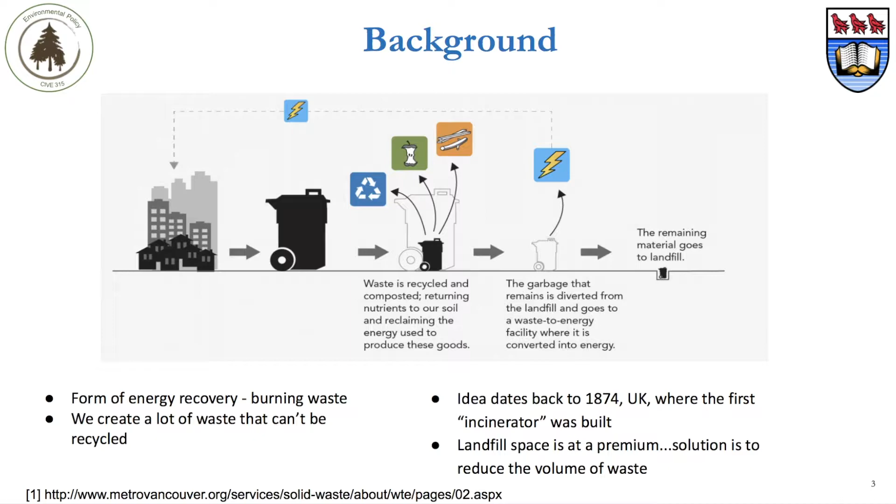Some background. Waste-to-energy is a form of energy recovered from burning waste. We create a lot of waste that can't be recycled and is sometimes even impossible to recycle. Landfill space is at a premium, so the solution is to reduce the volume of waste. Independent studies and scientific evidence around the world have actually concluded that modern waste-to-energy facilities are safe for human health and the environment.

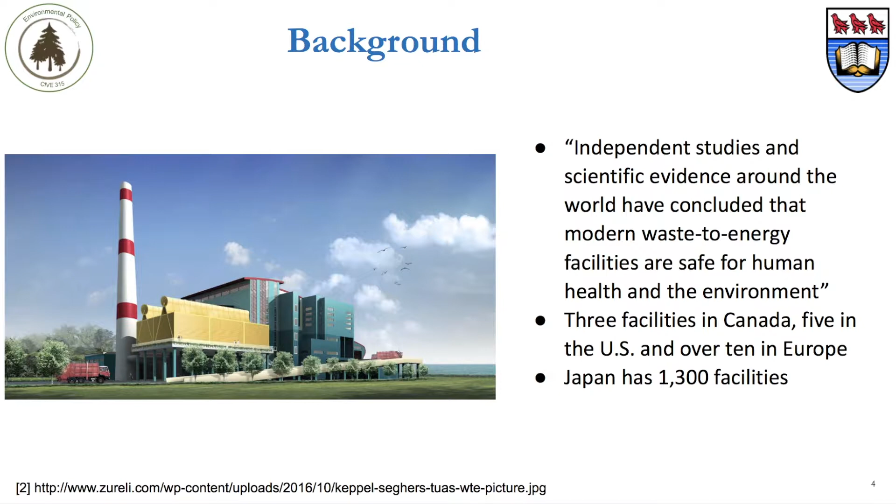There are three different processing ways. Mass burn incineration, which is the most common type. The second is gasification, and the third is refuse-derived fuel.

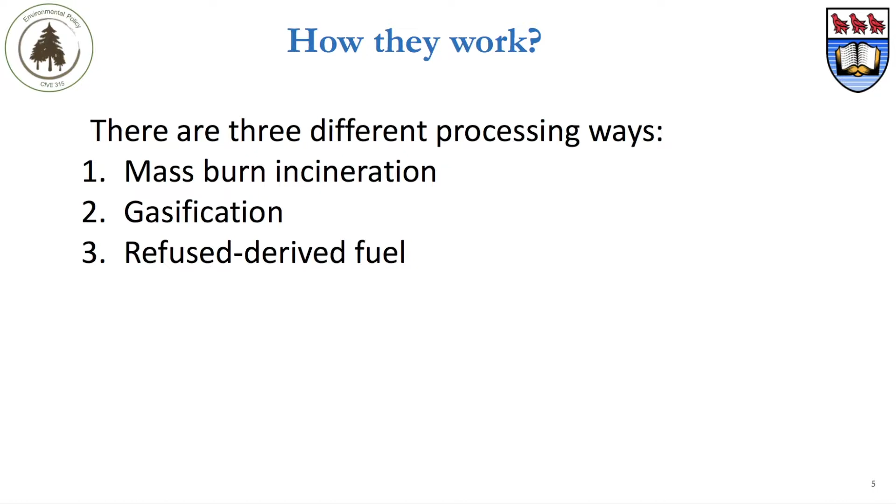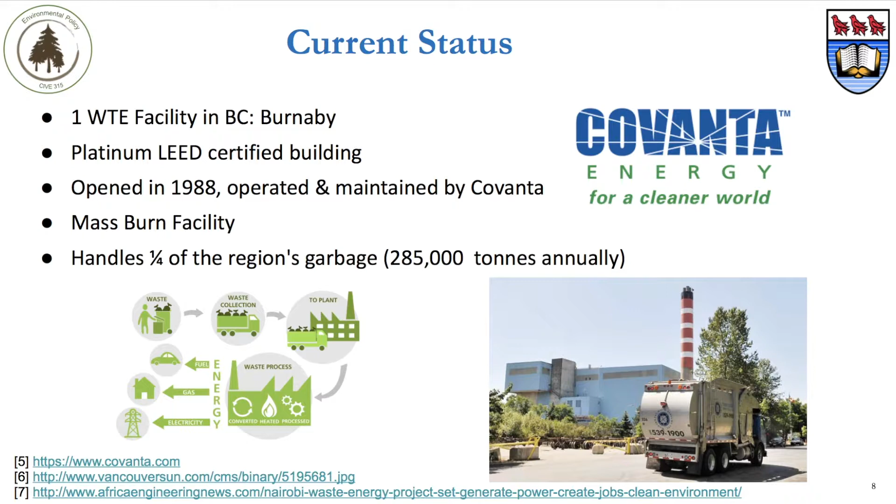So for the current status, there's currently one waste-to-energy facility in BC, located in Burnaby. It's a mass burn facility and it handles approximately a quarter of the region's garbage. The Burnaby plant creates some products and byproducts throughout the process, obviously the most important being energy, since that's the goal here, and it could power approximately 16,000 homes. But some byproducts that are created throughout the process are metals, bottom ash, and fly ash.

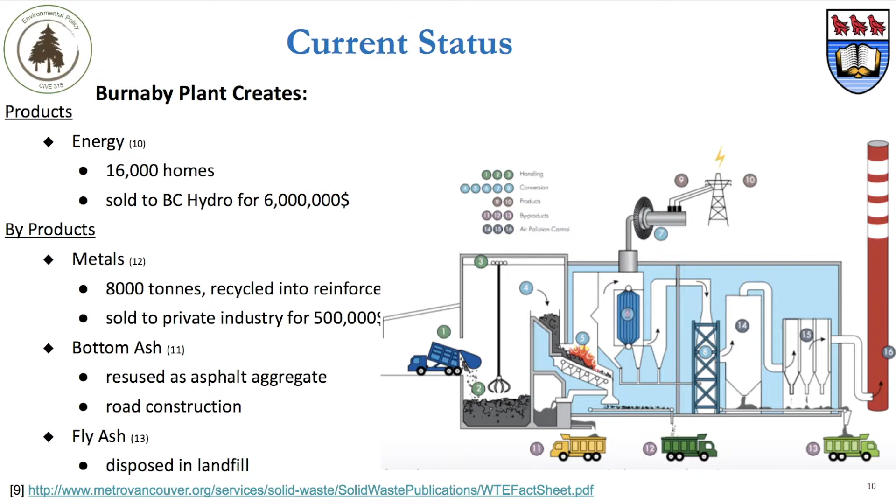As for the potential status, a new facility was proposed in 2012. Several sites were identified, including Nanaimo and Port Mellon, but all of these sites required the waste to be barged there, since mass burn incineration is banned within the city limits of Vancouver. However, this project was postponed in 2015 after very positive recycling efforts were happening in Metro Vancouver, and there were also some concerns about projected future volumes, as well as the project being quite costly.

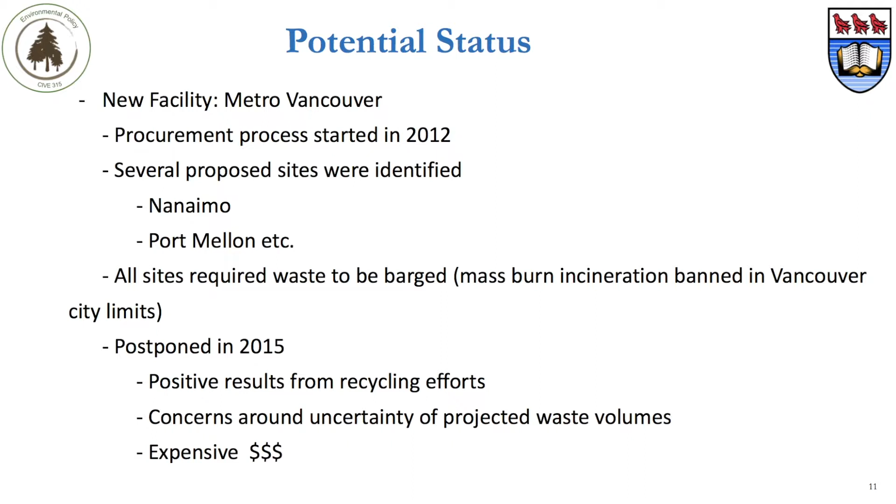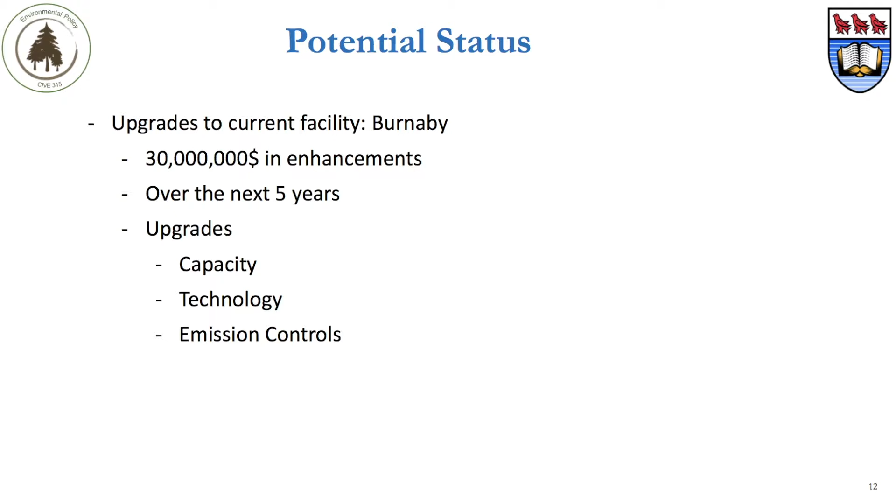As an alternative, more short-term solution, they decided to have some upgrades to the current facility in Burnaby, including $30 million in enhancements over the next 5 years, with upgrades such as capacity, technology, and emission controls.

Some challenges and concerns that have been raised around this topic include greenhouse gas, emission, and social aspect concerns. So to start off, some important greenhouse gases involved are methane and CO2. It is a bit hard to find information regarding this topic since it is quite biased. Some things that are available online are proof that they are within their emission limits at the Burnaby site. However, this is kind of a biased way of showing the information. It would be nice to have a comparison to the alternative method of waste being in landfills, but that information is not available at this time.

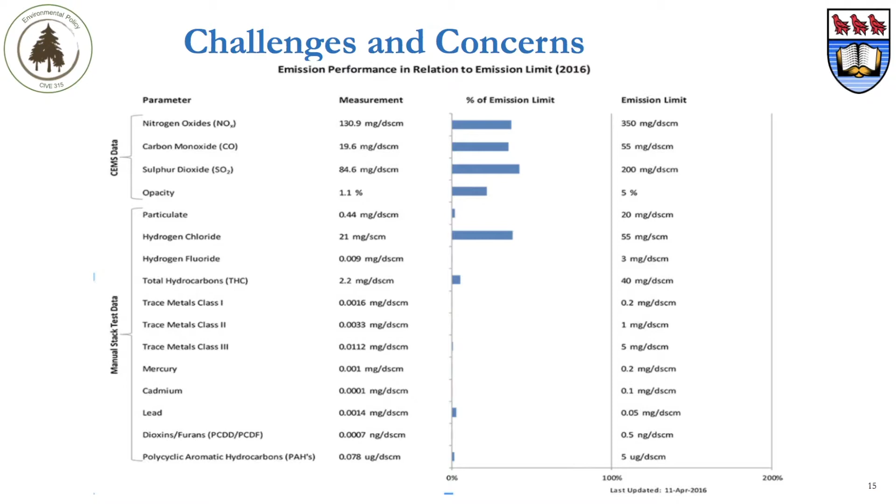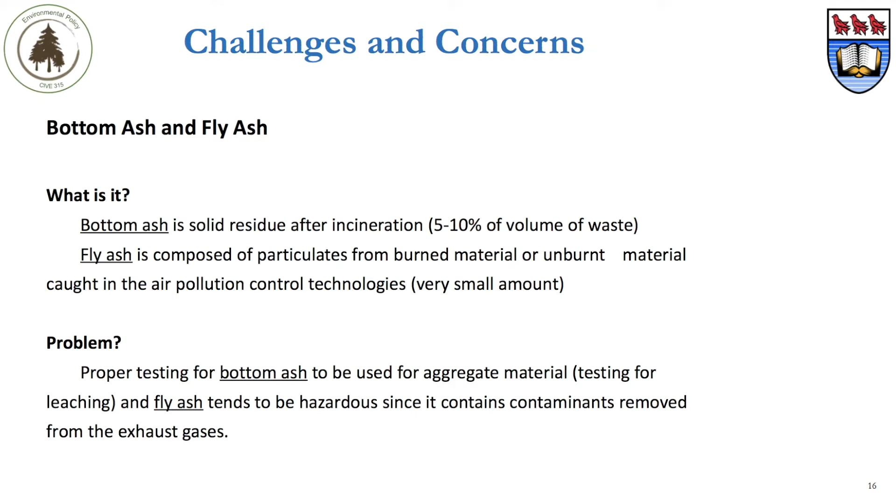Some more physical challenges and concerns are actually the creation of bottom ash and fly ash that is produced in the incineration of the waste. The problem is proper testing for bottom ash to be used for aggregate material, and the fly ash tends to be hazardous since it contains contaminants removed from the exhaust gases. Some other physical parameters are dioxins and furans. They're highly toxic and they're known as persistent organic pollutants, which means they actually take a long time to break down.

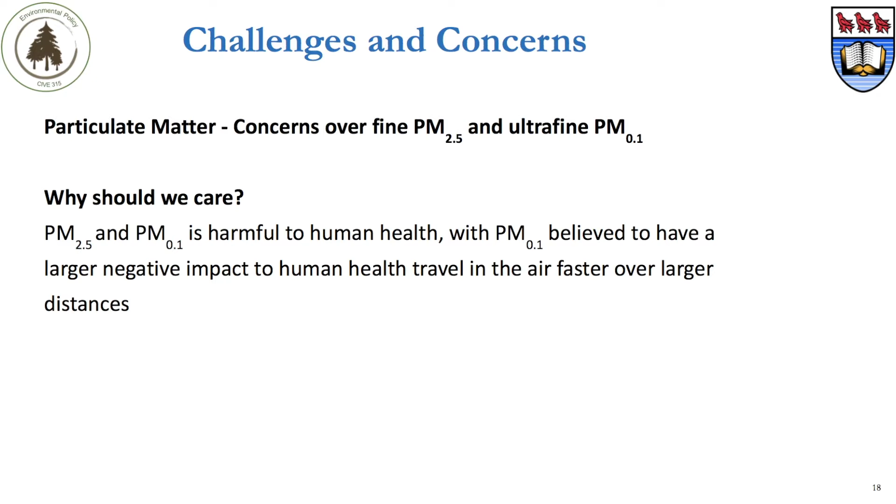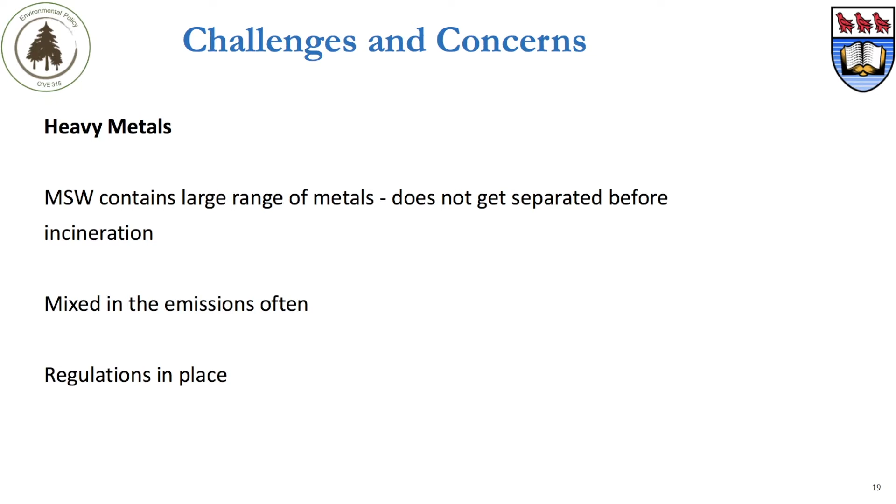Another issue is particulate matter, both fine and ultrafine. These can be quite harmful to human health, and they're actually believed to have a larger negative impact since they travel in the air faster and can travel quite large distances. And then a final topic we're going to cover for challenges and concerns is heavy metals. A lot of the time, heavy metals end up in our garbage by accident, and the processes to separate them out before incineration are maybe not as good as they could be, and these create quite harmful emissions, so that's a big issue.

The last major challenge and concern would be the social aspect: by creating these waste-to-energy facilities, is it going to decrease people's initiative to actually recycle? However, in Sweden, it has actually been proven that their recycling efforts are increasing even with all the waste-to-energy facilities that they have.

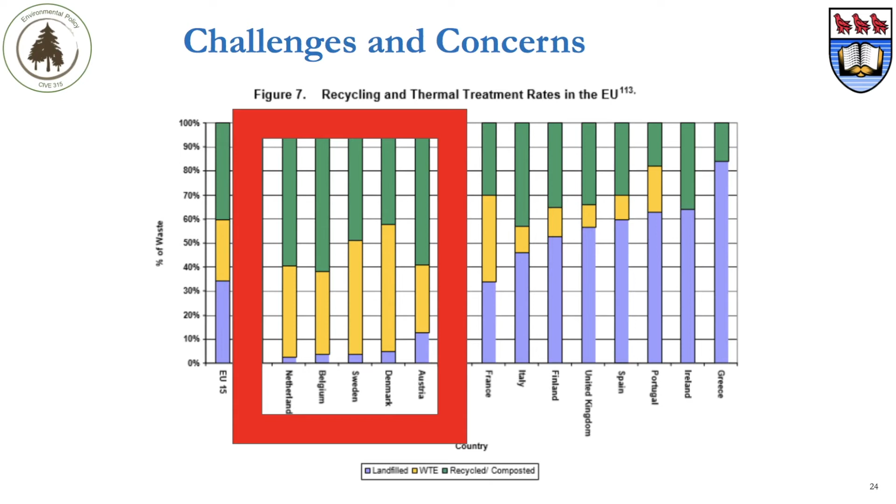So as for some final recommendations, first of all, it's very important that we are separating metals from waste before incineration, both through more public awareness of this issue and also better separation processes at the plant before the waste is put in the furnace. Second would be stricter regulations that match up better with the EU, since obviously that is possible. A third is having the owners of these plants be open to change and progress and having better efficiency. There's always room for improvement, with technology getting better and better by the day.